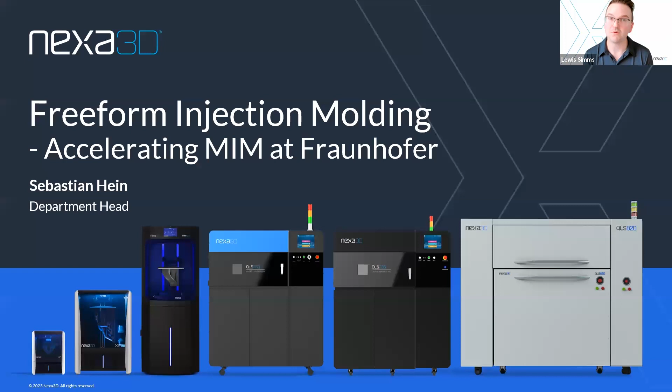Which I think is really an incredible application that expands what you can do with our technology as well as the xMOLD resin. So for today, here's what we're going to be covering. We'll talk about who is Fraunhofer, so you guys have a little bit of perspective of Sebastian and his background. We'll be able to address what challenge we're trying to solve with turning to freeform injection molding for MIM. We'll also address what solution we implemented. Basically, how did we get there? What was that process like? And how did we end up with beautiful metal injection molded parts? And then Sebastian's really going to be able to share as well, what did they get out of it? Why did they turn to freeform injection molding in the first place for this activity? And how are they going to leverage this moving forward? Before we open up for Q&A, and we'll answer all the questions you might have.

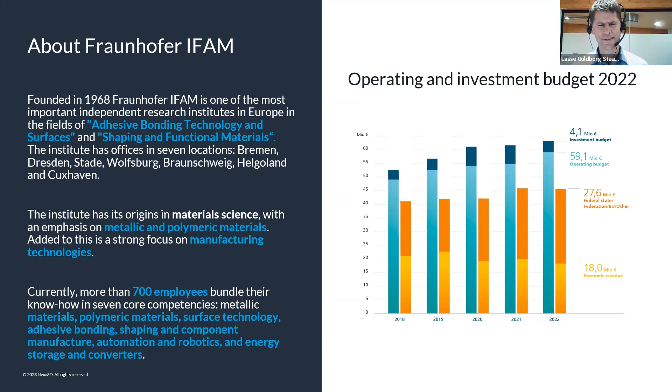I'll be at Formnext next week, where we'll also be talking a lot about freeform injection molding. And for those of you who are not familiar with the freeform injection molding process, it's basically a hybrid between conventional additive manufacturing and injection molding. Today, the focus is going to be on metal injection molding.

But those of you keeping up to date with what Nexa is up to will know that we have also been dabbling in high performance thermoplastics, silicones, composite materials, ceramics, and we try to make it plain that this solution we have is a very versatile tool.

The process itself, of course, starts in the CAD environment with the design of a part, which we then convert into the design of a mold, which is the inverse of the part, of course. Designing is done in whatever CAD software you have at your disposal. It's not a very complex process because at the end of the day, a FIM tool is basically a block of metal that encases the part, and it contains an inlet for the material to flow into, and it contains at least one outlet so we can get the air out of the mold.

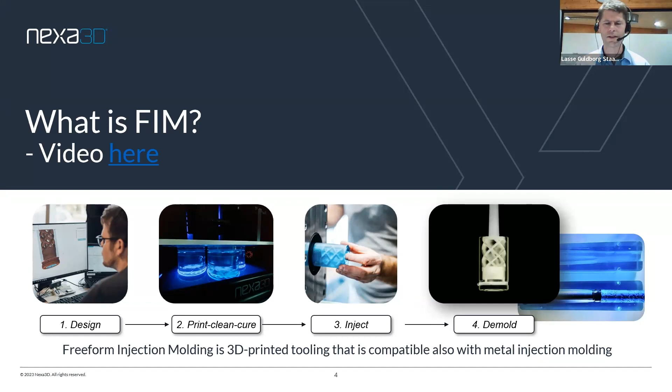So with that, I'll hand the speaker baton back to Sebastian for a review of how this process actually interfaces with metal injection molding.

So you have this material that you can directly put onto a very typical commercial injection molding machine, perhaps with a hardened screw, but otherwise a completely normal injection molding machine, and just shape your part according to the tool that you have attached to the injection unit.

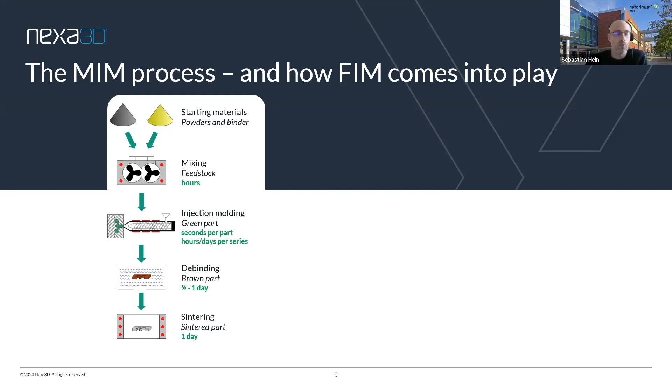While this is done, they shrink and eliminate any porosity so that you receive a shrunk version of this injected part, but usually with a density of around 95 to 100%, depending on the material. And you can see some of this takes hours, seconds, the debinding about half a day to a day, the sintering a day.

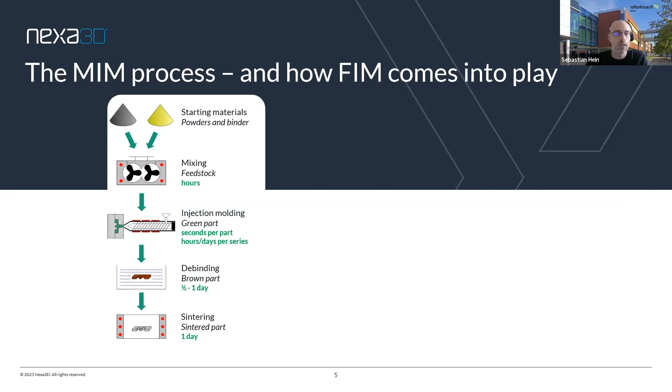But we have this component here, where the component that we are focusing on now is the tool. Because this has to be, of course, constructed, which is not as simple as with a FIM mold, because you have a lot of components that you need. It has to be opened. You have to integrate cooling, sometimes sensors. It can be quite complex, and the manufacturing then of all these components of a tool usually takes weeks, sometimes months. Depends also on who does it.

Do it yourself? Do you have tool manufacturing in-house, or do you outsource that to a tool manufacturer? And usually when you have the mold for the first time, you test it and you see some aspects are not perfect, so you have to rework, you have to adapt the tool, and this all again takes some days or weeks. So this is really time consuming to get the mold for your production.

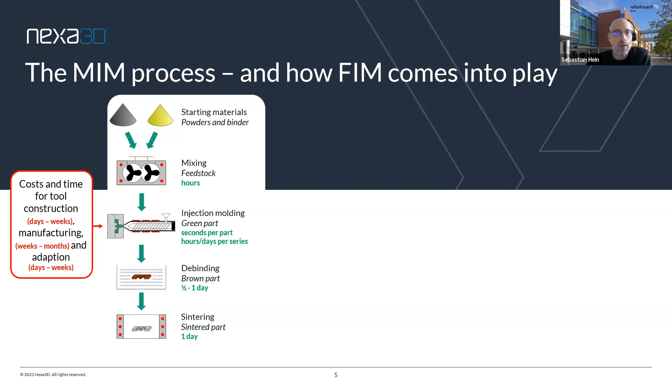Now, where the FIM comes into play, the freeform injection is the next, you can see it here. So basically, we don't have this complex tool, but we have a very easy tool, basically a base mold, as we call it. So you have either a rectangular or a cylindrical opening in this tool where you can place this printed shape inside. This printed shape here, in this case, as Lasse explained, is an insert, a mold. So it's a block that has some cavity and some inlet, some outlet that you can see here.

It's simplified just with the inlet with a sprue, and then if you print this and put it into your base mold, you can see that there's a line, the opening of the mold, which is the sprue, the gate, and there the feedstock comes in and fills basically everything, if you do it correctly, that was a cavity inside your printed mold, and then you can eject this as a block that is filled with the feedstock, and then you can remove this mold.

As Lasse mentioned, the most important aspect here is the dissolution of this material, which gives you the opportunity to have any kind of undercuts that you would not simply be able to eject, because it's just geometrically not possible. And then you can see this is really done in a matter of hours to a day. So basically, the dissolution of the mold is the longest aspect of this chain here if you introduce it.

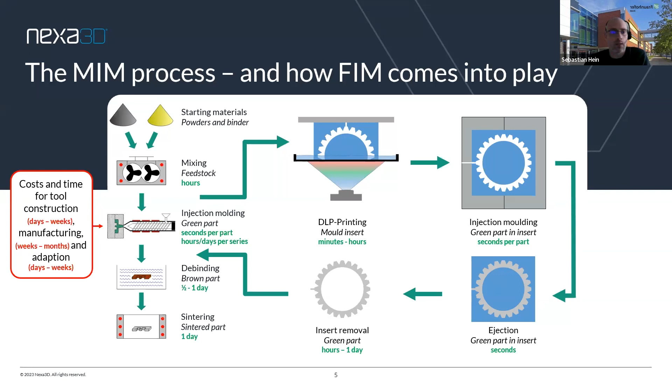So having a base mold ready, where you know the outer shape of your insert, the mold that you have to print and put into this base mold, you can really get going very fast and generate prototypes very fast compared to when you construct and build a complete mold out of metal, the way it's usually done. And with that, I head over again to Lasse for the next aspect we talk about.

Thanks a bunch. And before I dive into this slide, Mark Morrison kindly asked the question, is the mold ever reusable or is it always single use? Well, we try to reuse them whenever we can. The fact that molds can be dissolved does not mean that we have to dissolve them. The reason why we usually end up in a dissolving scenario is that most of the parts we get to work with are fairly complex. Now, one example, and this is just a tool that I always have on my desk, is our impeller.

Those of you occasionally active on LinkedIn will have seen the impeller as a part, but this is a tool creating the part, and it consists of one side, which is very simple and utterly reusable, and then it consists of one side, which I wouldn't want to reuse, because if I try to reuse it, I basically break my part. So I can reuse this part, but this part goes into the dissolving.

Of course, that requires that my material doesn't stick to my mold and that my material is not fragile, but for most feedstocks, including the metal injection molding feedstocks from BASF, the Catamold we are using for this case study, you can do a partial mold separation. If your part is simple enough, you can also separate the mold completely, and then you can reuse. So I hope this answered the question, Mark. Otherwise, please elaborate.

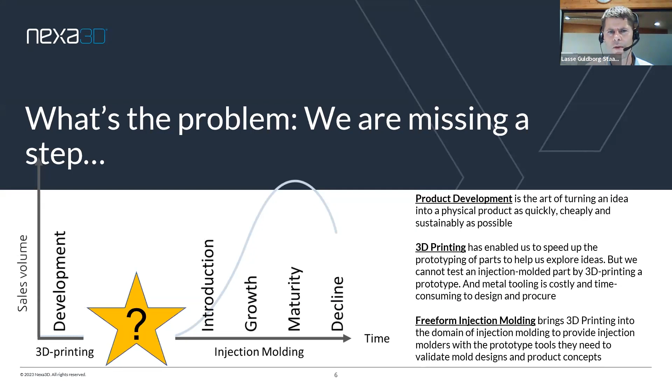So that's why we introduced freeform injection molding as that crossover that starts in 3D printing and ends up in injection molding, with the abilities of incorporating the entire range of injection moldable materials and the design freedom from 3D printing retained. So that's the problem we're trying to solve, get from prototype into production with a better decision quality, with a better test domain. And for freeform injection molding in the metal injection molding domain, some of the problems that Sebastian has already mentioned are related to the complex materials, metal feedstocks, but also to the quality of those materials. And this is some of the things that I know Sebastian will be talking about a little later. So next slide, please.

I have been working with Glenn Mason from Wilson Sporting Goods for quite a while, and he is a great guy for many things, including to condense the key impacts of freeform injection molding in the world of Wilson Sporting Goods. And one of the key experiences that he has had is that even with the best simulation designs, even with a fully integrated injection molding tool factory, you will be limited in the amount of time you can reduce in a development process, because essentially you need complex machinery, you need highly trained operators, you need precision time. And problems with the metal tool is also that when you start cutting into metal, you are basically freezing your design. Nobody wants to start reworking a metal tool.

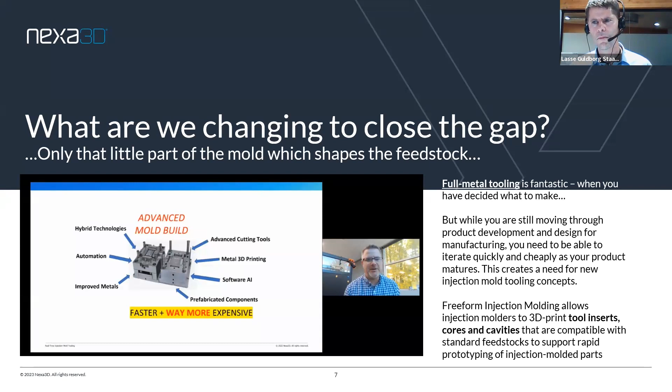And one of the reasons why I think metal injection molding is interesting is because after the injection molding process, you've got that secondary step of sintering. You also learn about your parts in the sintering step, and that certainly increases the risk that you'll have to rework your tool. So what we try to change in the equation of injection molding is to make the mold cavity itself more flexible and a lot cheaper to manufacture in the prototyping stage. And if we look at the next slide, we can see that the key impact from printing injection molding cavities instead of cutting them in metal is that we reduce the cost of failure.

A cavity like the one I show here costs perhaps 15 to 20 euro in total to make and fill and demold, whereas a complex metal tool can run into the thousands of US dollars or even more. And that means that the point of injection molding is the point where you really start accumulating cost in your product development process. By 3D printing your cavities, you reduce the time to fail, which means you get improved decision quality, and you definitely also reduce the cost to fail.

One of the key quotes from Glenn Mason is that as soon as he gets the first part out of a tool, he knows whether his idea is good or not. And it really sucks to have developed and manufactured a metal tool for a wrong idea, which costs even more sometimes than a great idea. So Glenn Mason's key take home from implementing freeform injection molding is that it allows him to iterate faster and cheaper, while at the same time reducing the cost of failure.

And if you look at a process like metal injection molding, where you have a debinding step and a sintering step after your injection molding, the costs of failure, the costs of getting the tool wrong, are going to be even higher than the costs experienced by Mr. Mason. Next slide, please.

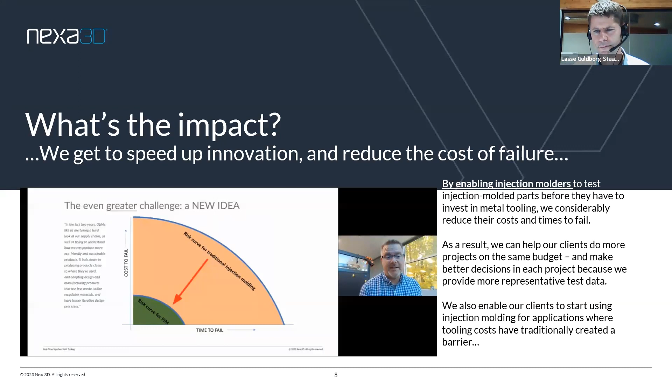The key use cases that we have been focusing on when we develop freeform injection molding are three main cases where we have a combination of high mix and low volume. Of course, we have a first design and development phase. This is where all additive manufacturing technologies have an important role to play. But since we are focusing on the injection molding, which is the manufacturing technology, we can also follow the product

into the market. If you've defined a good recipe for injection molding a small volume of parts, like 50 for a test, you've also defined a production protocol for making 50 custom fit objects. Could be for a specific customer, could be for a specific application, could be a specific adaptation of a high rating part. And that means that if you implement freeform injection molding in your product development, you also automatically get a low volume manufacturing added to your prototyping domain.

This low volume manufacturing, of course, is useful when you start scaling up and adapting your product. And it's also extremely useful for the spare parts management later in your product lifecycle, when you want to start scaling down your product because the demand is declining, and where you may not want to maintain an expensive injection molding tool. So 3 core use cases: prototyping / product development, customization and adaptations, and spare parts on demand.

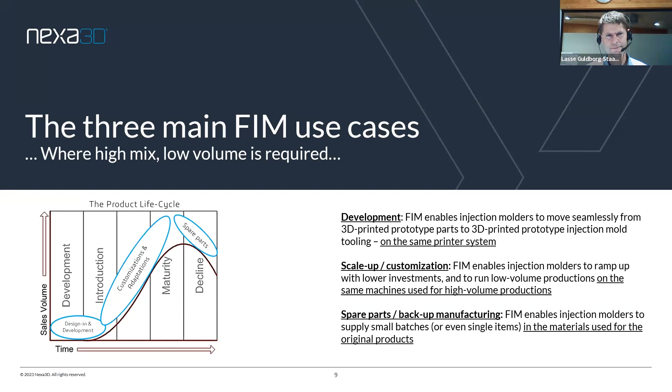Yeah, so perhaps some of the aspects of these questions will also be answered during the next slides. So what are we doing with the freeform injection molding? So, of course, we are a research and development organization, or an institute of an organization. So we, of course, want to understand processes and bring them as far as possible into the market, so that sensible things can be done with these processes, I would say. And in that respect, we look at different aspects of the whole development of these processes.

And for the freeform injection molding, one of the most important things that we have come to realize, which may not be surprising, is actually the design of the molds, the inserts, because how they behave during the process is the most important aspect that we have to look into. And designing them so that they can be printed, of course, because there are some limitations for each process, and that also goes for the DLP process that produces the mold.

Of course, we are looking into the injection molding side of things regarding the materials. So can we use the standard, commercially available feedstocks, or can we adapt some things that improve on that?

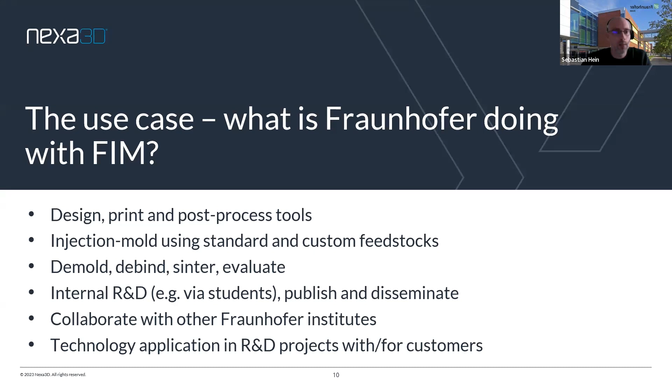And now one key difference between these printed molds and metal molds is that you cannot really heat them the same as a metal mold. A metal mold has some internal channels where you can heat with a thermostat, because you can pump water or any liquids through these channels and then heat the mold. So you can directly influence the way that your feedstock will flow or stop flowing during the injection. And this is one of the key differences.

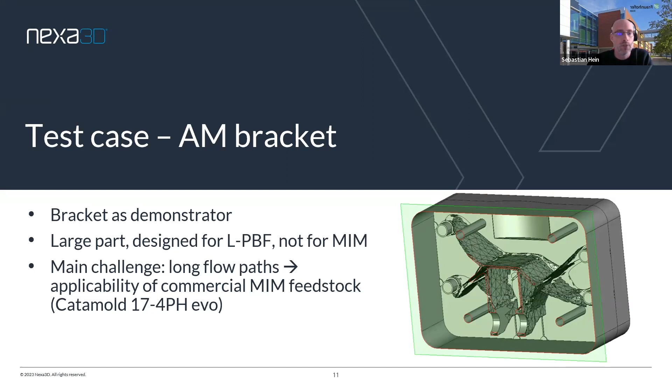And on the next slide, we see the results. Of course, not everything worked perfectly. This is basically the best part that we got out. We saw that we do have some difficulties with filling the mold due to the reasons I just explained. The mold is basically cold compared to what a metal mold would have been set to in terms of temperature. So the filling is not as easy.

And also we have a design of our base mold that is not perfect for these kinds of large molds, because we cannot really apply the clamping pressure to hold the mold closed. Due to that, we cannot inject with a very high pressure, which leads to a high speed of the feedstock to fill the cavity. And as it's cold, we would actually have to inject faster than we would with a metal mold. This wasn't possible due to the base mold concept, and that's why we didn't have a perfect result.

But as you can see, we achieved the filling, and we could also demold the part. We had some issues, but it worked quite well. Debind and sinter afterwards without issues.

So basically, you can see that you have a typical metal part. Sinter density was the same as a usual MIM part, and we do have some distortion, but of course, this is not a MIM part, so it's not designed for sintering, because in sintering you have to watch for other details than when you just inject a material like plastic injection molding. Different aspects come into play here, but I think it's nice to see that it worked still, and we got this nice part.

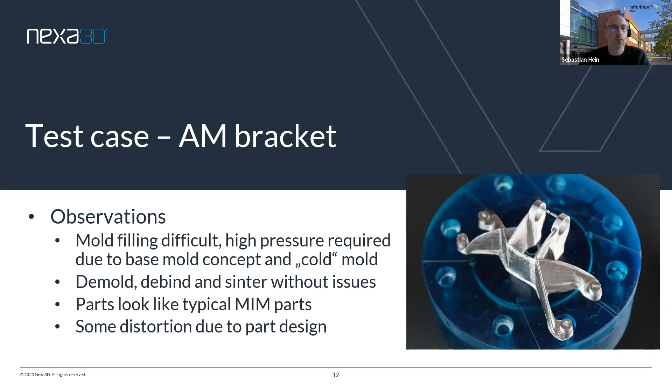And of course, we did some other stuff in the past, and the next slide shows a little of the first works that we did when we didn't even have the printer yet at our facility. So these molds were supplied by AddiFab at that time.

So we did some very initial tests with this nut and bolt design. We tried some watch cases where we saw some of the issues with removing this material by dissolution, because one aspect you have to take into account, which I will go into more detail on the next slide, is that this material, when you dissolve it, swells slightly.

Now this feedstock, this metal powder filled polymer, is quite rigid, so it's prone to breaking quite easily. So when this material that you remove from the mold swells a little during demolding, you have the risk that you see at the bottom right, that you may crack a part, especially when internal material expands and presses to the outside of the part. I hope you can understand that. That's why, for example, in the lower bottom right, you can see this crack on this mold watch case at the top due to this slight swelling.

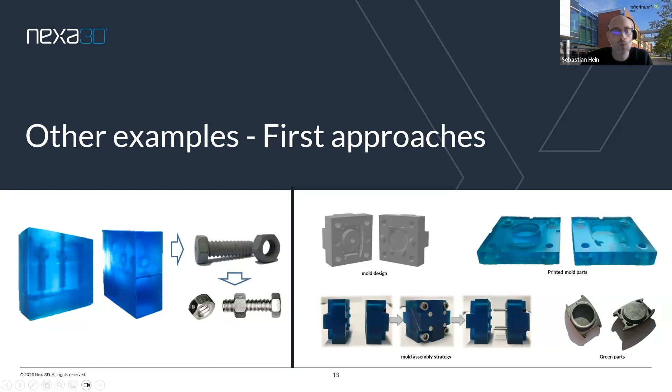But as I said, we also have some work here with students, and we recently had a very nice bachelor thesis work here that you can see on the next slide. At least a very small part of it, and so we dove more into depth into this aspect of how to design the mold to successfully get parts out of it. And we were asking questions like, how thick does a wall have to be? Does it even matter, or where do we have to look?

And one of the main takeaways that we realized was that this swelling of the mold itself is the issue that you have to look into, and you have to compensate it, but not just by avoiding it. Not just like removing the outside part of the mold and just dissolving the inside, or the other way around, but you have to create the mold in a way that anything that swells and may induce a force on your part is counteracted by the other side of the mold. So basically, you have to find a balance of the forces that can occur due to the swelling.

And this is the part where it really gets interesting, because we realized how to better design molds, how to approach this. As you can see in the lower middle picture, of course, we try to minimize the amount of material that we have to remove, because this material costs money, and the more you have to dissolve, the more material you waste, basically. And of course, it takes longer. So cutting down process time by shortening the demolding step, and cutting down costs by trying to make the parts as small as possible that you have to demold.

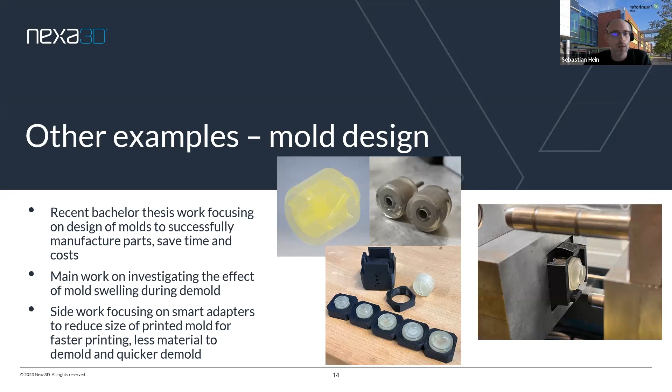And then when you just place in these small parts that you have to dissolve, you actually do a lot of saving time and money in the process. So this was a very interesting work that led to a lot of insights on our side into the design of the molds. And with that, I'm basically finishing with the examples of the parts on this slide.

So what we try to see is these wall thicknesses that we can make, and you can see sometimes these parts break. So there is some kind of a minimal wall thickness. It's very dependent on the feedstock, and we didn't investigate different feedstocks here, but we saw that you can go, for example, for this cutter mold in this case, down to about 1 millimeter wall thickness, freestanding, so to say.

But as you can see on the right side on the photo, where we have sintered parts, well, there are some parts that have even some issues that you can see with cracks. So it's not that everything that we do always works perfectly. So there is still a learning that we have to do, but as you can see more in the back, we could really make a lot of parts that were perfectly fine.

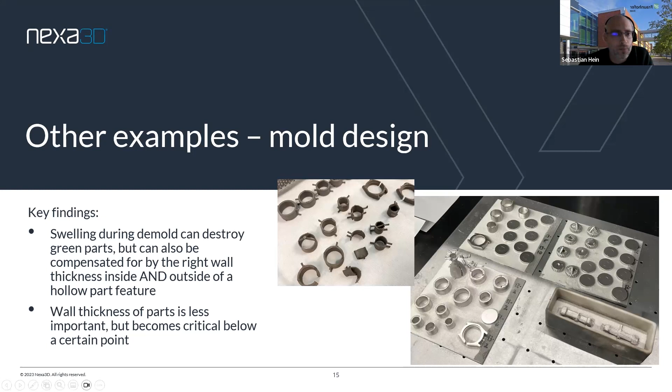And the interesting thing is that really all the features that you have inside your printed mold, they translate perfectly to the feedstock. And this is good to know and very important to know.

This relates to the second point: the surface quality that you have inside your printed part translates to the metal. So any stairs, let's say, from printing, any waves, any roughnesses, they will definitely translate into the metal part. So of course you have different quality aspects than with a tool made from traditional processes where you can polish the surfaces and have very super surface quality.

So you will not be able to have everything that you can have with the metal mold, but you can have different aspects as well. So very interesting still. And from a metal side, it's the same - density, microstructure, the composition.

As Lasse also said, we don't have any residues from the mold. So after sintering, the microstructure and the density are there, same as MIM parts. It's just the other properties like the surface quality that directly depend here on the printed mold, and that you have to take into account.

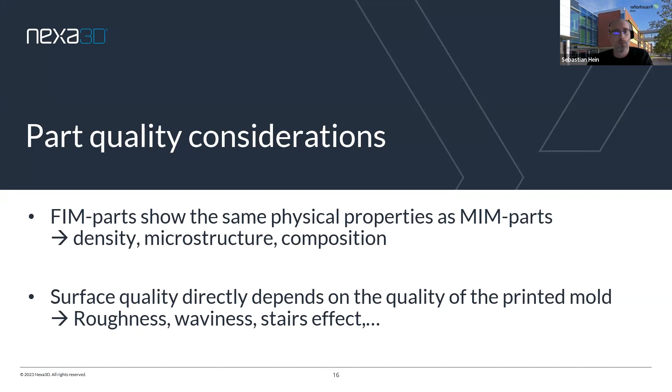As I said very early on, the laws of MIM, so to say, still apply. So what's not good for a part for MIM, because you have to sinter it, is when you have transitions from very thin to very thick walls, because this is always where you have the highest potential of distortion during sintering due to some bending, some forces that will distort the whole part.

Gate positioning and also the dimensioning of the gate is important, because you want to be able to fill the mold properly. And of course, if the gate is too narrow, you lose a lot of pressure. You cannot really inject the material with a high speed. Or when you position the gate in a stupid way, let's say, you may get injection fronts that combine at a certain place where you get some cold weld lines.

So there are a lot of things that come into play, and this of course can also be supported by mold filling simulations that are state of the art, that you can use to simulate the filling behavior of your printed mold if you are not sure how the flow fronts behave, for example, and how the flow path is. And if you want to avoid these weld seams, as they're named here, you can integrate simulation for the mold filling.

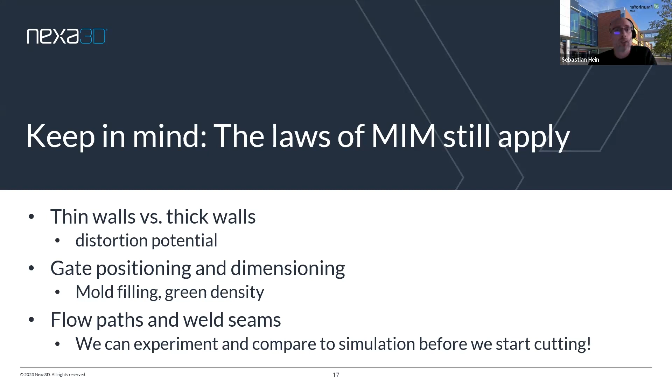So what's the impact of the freeform injection molding? Of course, it doesn't replace anything. So it usually adds to, well, let's say, the possibilities that you have.

As Lasse said, one aspect is that you can shorten design cycles. Usually when you have to rework these traditional molds, this is so time consuming. You can rework these freeform injection molds very quickly, as we already showed you. Thus, these iteration steps are not as costly as when you do this with a traditional mold. You can actually basically do the design cycle completely before you even start investing into a mold. You can parallelize this as well to save even more time if you're sure that you achieve where you want to get.

But I think this requires a lot of knowledge and experience. Of course, it may be able to reduce waste. You have different kinds of waste that you produce, but it may not be as much. And perhaps, as you save some costs, you can do even more projects. So there are some advantages that can definitely be seen.

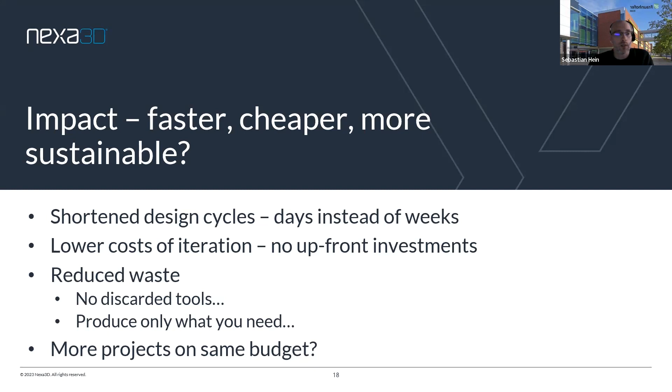So where do we want to go forward in the future? Of course, as I mentioned several times, we're a research institution, so we want to drive these developments I've just highlighted here very briefly. New materials is just basically what we're always interested in developing, and perhaps some of the materials that may give advantages in freeform injection or freeform metal injection molding may also be interesting for injection molding itself. As I said, you can use the production material, but if you can, for example, demold or do the debinding of the feedstock during demolding, the chemical debinding, this would save time.

Of course, there are water debindable binders on the market, and those may also be combined and debinded during the demolding where you dissolve the mold. So this is stuff that is definitely interesting, where you can save a certain step that you would otherwise have to do.

Of course, we are also interested in how manufacturing changes in the future, and how freeform metal injection molding may also support things like mass customization, virtual warehousing, and spare parts on demand - all the things that additive manufacturing potentially addresses. And that's, of course, leading to new business models in the long run. So these are perspectives that we see.

I will jump in real quick and start passing through - we've got several good ones coming through. This is a good one too that I hope we have made clear, but it definitely bears emphasis: can this technology be used for molding metals only, or would it be possible to mold polymers as well?

Yeah, of course. It was first developed for polymers, so that's actually why I first saw it - I think it was at a Compamed in Düsseldorf when I saw it first, showing a plastic molded part. And then I said, yeah, why not bring this into the metal injection molding that I know. Of course, there were already some works going on in this direction, and we also have colleagues in Dresden from IKTS, another Fraunhofer Institute, who use this for ceramic injection molding, for example.

And we have different molding-based technologies that may also be interesting, not just injection molding, but casting, for example, with materials that can just cast without any pressure into a mold and then solidify. So there are a lot of options for how to use this. Anything that you can basically let flow into a mold is potentially something you can think about applying this freeform injection molding concept to.

Thank you, Sebastian. Yeah, I do think it's important to point out this is an opportunity to leverage injection molding for some complex stuff like ceramics and the like. So I think that just speaks to the extreme versatility of the material.